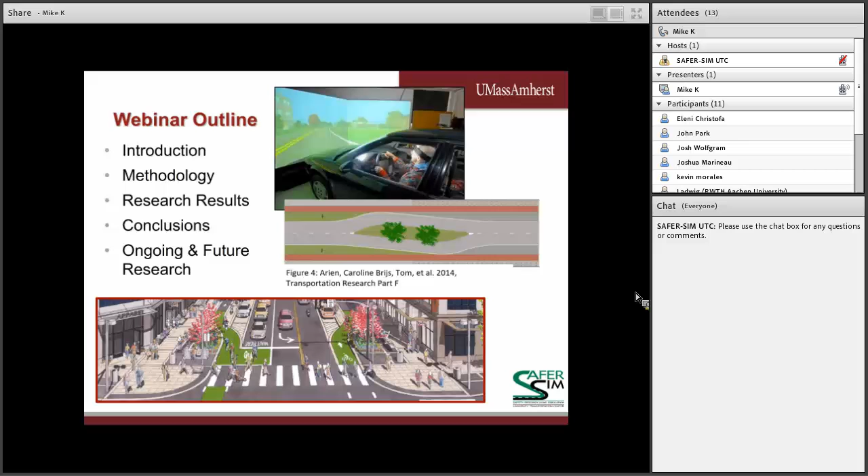So today, like I said, what we're going to do, a brief little introduction. We'll outline some of our research methodology, talk a bit about our results as well, and then, more importantly, some of the conclusions as well as some of the ongoing and future research that we're currently in the process of completing. And I know that the highlight talks about cross-sectional design, and we'll talk a little bit about why that's important.

First, by way of a bit of background here, there's several different factors that influence the manner in which people drive, and we could probably spend an entire day just talking about those different factors. It includes the significant amount of visual information that drivers are being required to take in while they're operating a vehicle, the impact of other vehicles and the influence that it has on driving, as well as our own vehicle performance, and certainly the weather and other elements such as that. And when we put this together, we think about, well, what is the cause of crashes?

And so, we have relatively famous graphics and some numbers that I'm sure most of the folks on the webinar are familiar with. But the roadway environment is a contributing factor in 34% of crashes. Human factors are a contributing factor in 93% of the crashes, and the vehicle is a factor in 12% of crashes. And when we think about those, there's elements of failure in roadway geometric design as it relates to the roadway environment, speeding and aspects related to speed under the human elements, and certainly vehicle performance under the vehicle characteristics that come along with that.

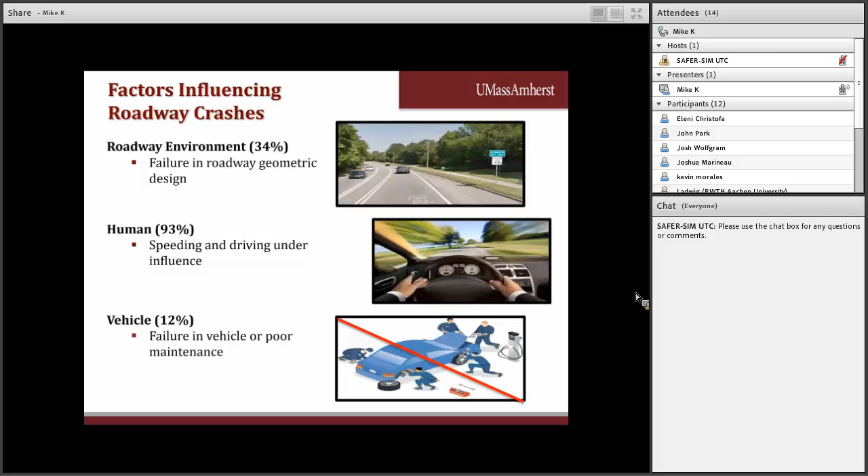And when we put that together, we end up with a graphic, again, a relatively famous graphic, where we look at the contributing crashes and the overlap between each of those elements within the system, the vehicle, the roadway, and the driver, and certainly the area where they entirely intersect. And we think about numbers. It's why we do what we do, right? So on average, the 37,000 fatalities from 2006 to 2010, or more recently the decrease, but now the fact that we're going back up again with respect to recent trends.

And one of the bullet points that we hear about on a regular basis, and our own data proves that, is the impact of speeding related crashes. And so, one of the things that we have the opportunity to do as transportation engineers is to identify ways that we can mitigate the effects of speeding related crashes, so that we can create an environment that makes it conducive to drivers traveling at the speeds that we ultimately want them traveling at.

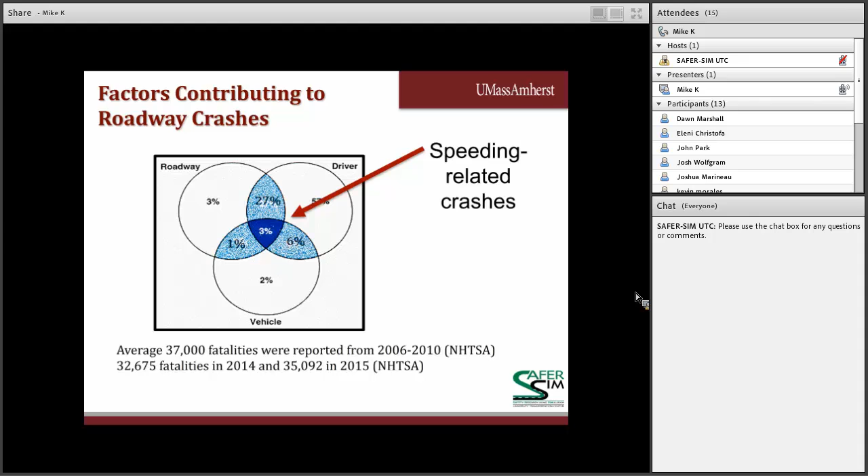And so the front lines of speed management in many people's eyes is speed limits. And again, you could take an entire course on this. If you've participated in the FHWA or NHTSA speed management course, a big part of the course is all about setting appropriate speed limits. I know we have some folks participating from New York. We've got folks in Boston. You're starting to see more and more municipalities lower overall speed limits to 20 or 25 miles per hour in downtown areas.

And one of the things that we know is, without a system-wide change, which is significant, if it's simply a roadway environment where all we do is change the speed limit, whether it's changing it up or changing it down, we know that the change in speed limit signage alone doesn't result in a drastic change in the speeds that we see on the roadway at all. And that's whether we adjust the speed limit upwards or downwards, and by as much as 0 to 5 miles per hour up to 15 to 20 miles per hour, the average speed tends to remain constant, which shows that the roadway environment has a significant effect on the speeds that people are traveling.

And so when you participate in different courses, there's a litany of different things that we can talk about with respect to roadway design. Context sensitivity, traffic calming, I'll talk a little bit more in a minute, but more commonly roundabouts or perceptual measures like some of the ones that you see here on the right, as well as vehicle activated speed displays, the notion of variable speed limits, which are popular in different parts of the country, and then the various roadway design elements themselves that we might think about.

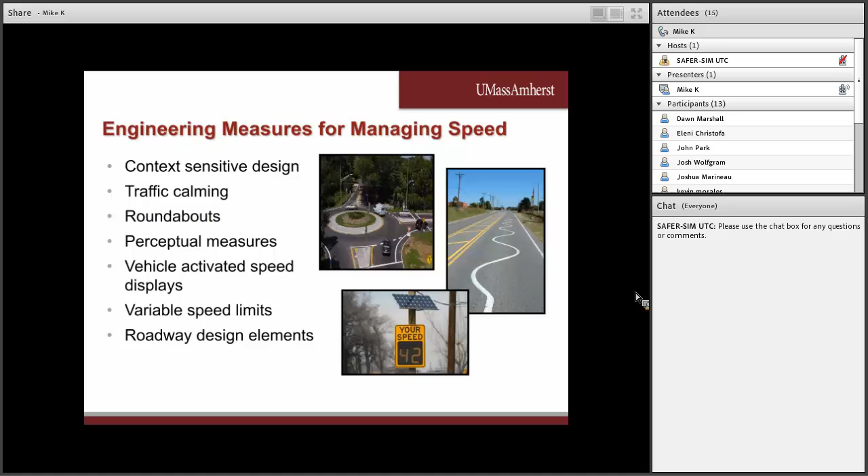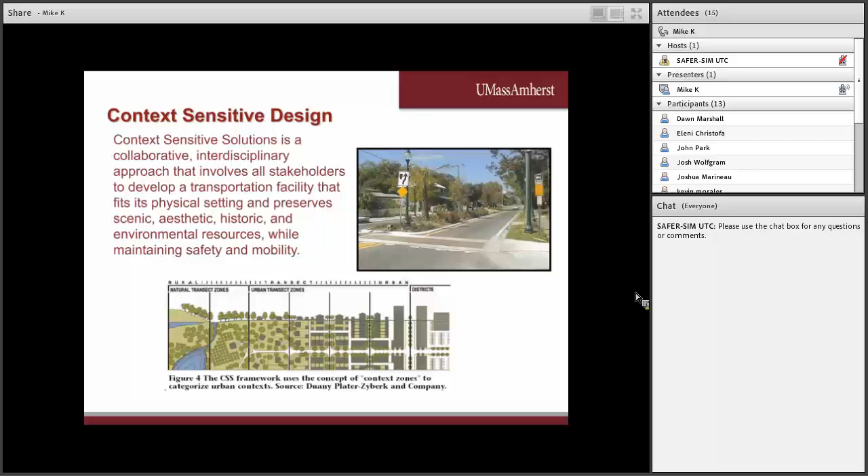So from a context sensitivity standpoint, right, altering the roadway environment to create an environment that's suggestive of a different speed or a more appropriate speed, or at the very least the changing context in which the roadway environment is changing. And then we think about traffic calming, whether it's neck downs or speed humps or speed bumps or many of the different traffic control devices that are intended to reduce speeds as a result of their performance.

But one of the things that we wanted to do in this particular study, apart from traffic calming and other devices, is think about the left to right, the cross-sectional design elements on a roadway. And we were primarily focused upon two different variables, speed and lateral positioning. And I'll talk about why those are significant.

But if you think about the roadway cross-section, as we think from left to right, we've got elements that include the side slope, the cross slope. Do we have a curb, yes or no? Do we have a shoulder, yes or no? Do we have a bike lane, yes or no? Do we have multiple travel lanes? If we have travel lanes, how wide are the travel lanes? Do we have medians?

And all of these different elements we know influence the speed at which drivers travel. And in isolation, we can identify what effect some of those specific elements have on travel. And there's been no shortage of field studies over the years that have identified what the impact of changing a roadway from this to that would have on speed, or changing a roadway from that to that might have on speed.

But we felt that that was somewhat limited, and here's why. There's so many other factors when you do a naturalistic study that would influence what behavior you're seeing, and there really hadn't been a true laboratory setting in which each of the variables was controlled. The drivers remained constant and we studied their specific driving performance to make sure that what they were doing was consistent

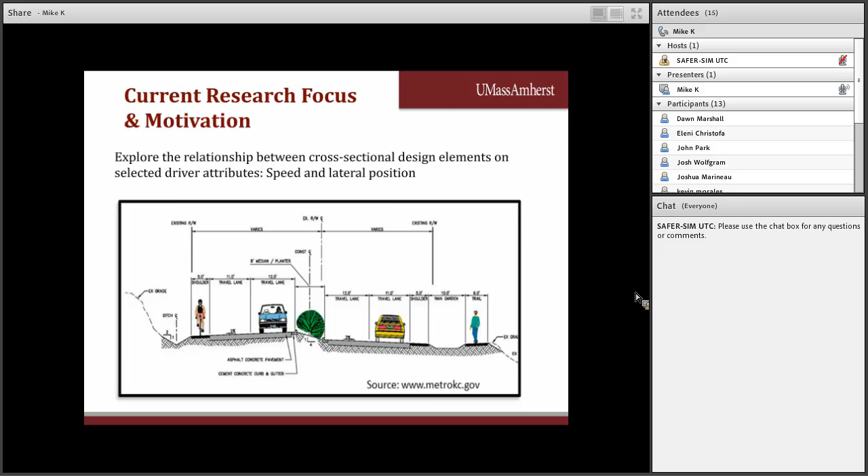And with respect to speed and lateral positioning, we might hypothesize what the influence of each of those roadway design attributes may be. So, for example, a narrower lane, we would expect to reduce the speed at which the drivers travel. We would also expect in a narrower lane that participants might move towards the center of the travel lane, or certainly to the center of the right-of-way.

We anticipate perhaps that a bicycle lane would not necessarily change the driver's speed, or you could actually probably make a case for why it might go up or down, but we wanted to know exactly what that particular influence is. And then what would the presence of a bicycle lane have with respect to lateral positioning, or what would the presence of a bicyclist within a bicycle lane have with respect to lateral positioning?

And similarly, when we look at raised medians and other roadway design elements, what is the influence on speed and lateral positioning? And our motivation for this study is really, we think we know these things, right? So we know bits and pieces of it, but what is it that we really want to know about these different roadway design elements? So I'll talk a little bit about our methodology and what we've done in this particular study. And it really starts here.

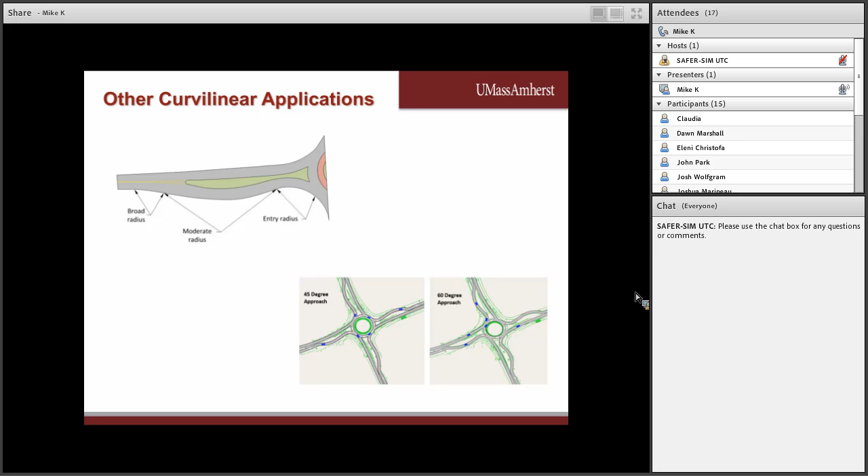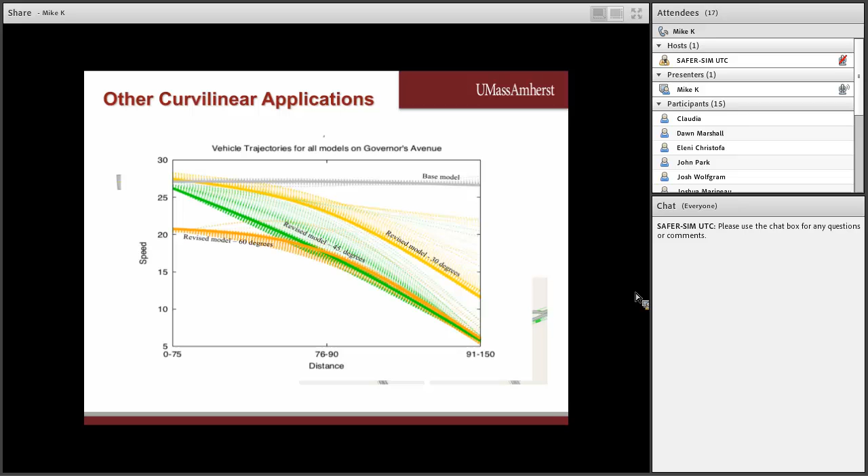And so one of the projects that we currently have ongoing that we'll talk a little bit more about later introduces varying degrees of curvature on the approach to a roundabout. And I'll just hint at this and say that some of our preliminary work is really quite positive in that we see that the approach speeds are significantly reduced as we modify the curvilinear approach as drivers are entering the roundabout environment. And so we can talk about this a little bit more.

So getting into the apparatus, our driving simulator is a fixed-base 1995 Saturn sedan, 3 screens, 150 degrees of horizontal view, and a resolution of 1400 by 1050. In fact, that number is probably a little bit off. And I'm happy to report that after almost 2 decades of spouting off those various statistics, we're actually about to upgrade our simulator next week, 2 weeks.

We're going to upgrade our simulator, and so it will no longer be a 1995 Saturn sedan, but more likely a 2015 Ford Fusion, which is a big leap forward. But not only that, we'll also introduce the presence of 2 additional horizontal screens, so jump to 5 screens, as well as a 6th channel, which will be rear projection and simulate the rear mirror.

And then the other big part of our work is the mobile eye tracker. Our particular eye tracker that we used on this experiment was the ASL head-mounted, visual angle 50-degree horizontal and 40 degrees vertical direction. And then you see a picture of it there, where it's really not intrusive to the driver in any way, shape, or form. We put what amounts to the glasses or the goggles on the driver.

It's got a scene camera so that we see exactly what the driver sees, and then it overlays a set of crosshairs so that we know where exactly within the environment the driver is looking. So it provides not only the scene camera, but within the scene we are able to know where it is that the driver is looking.

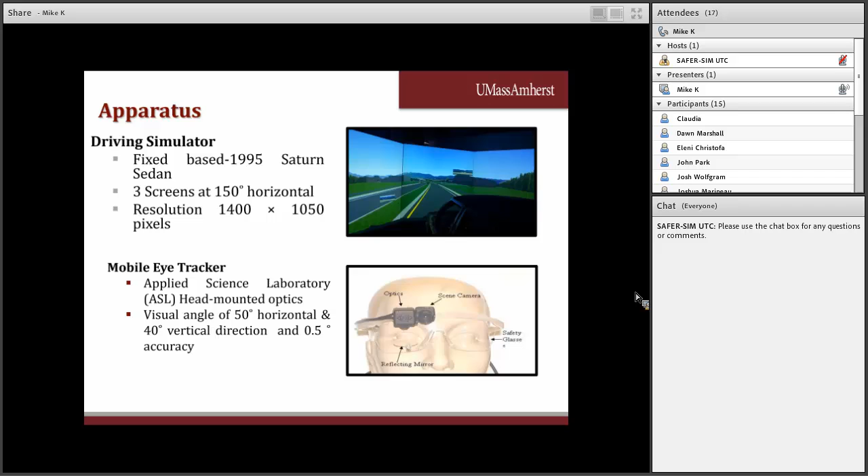Now, some of you might at this point say, well, wait a minute, there's no way to replicate speeds in a simulator environment. You can't simulate many of the different design features that we have in the roadway environment. And the reality is that's not entirely true. And in fact, one of our studies going back over a decade was just that.

It was a validation of the use of simulators for speed-related research. And one of the things that we did was we replicated a stretch of roadway in the simulator and in the field, and there were really 4 different layers to the previous work. The idea was to not only get a sense of what drivers were traveling at with respect to speeds, but also what drivers thought that they were traveling at.

So for a sample of drivers, they drove both the simulator course and the field course, and at different points, their speed was occluded from their vision, and they were asked how fast they thought they were traveling, and then we also recorded the speed at which they were traveling. And so we matched up those values from the field study with the exact same checkpoints from the simulator study, and identified how well we were able to do in terms of matching speeds.

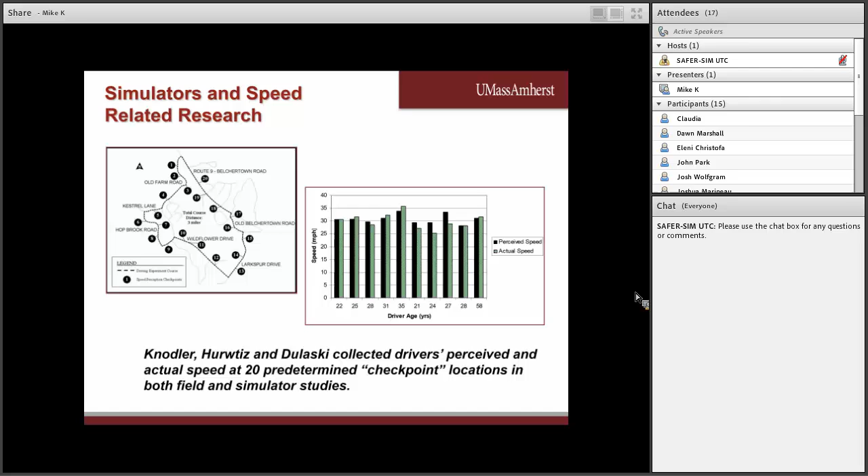Now, the speeds in the simulator were a little bit faster overall, but the discrepancy between perceived and actual was identical, and so with a slight little calibration, we were able to know that the magnitudes and the changes of speeds were appropriate, even if the overall speeds were a little bit higher in the simulator environment. So just a little bit of background.

So because we were taking an existing roadway and we were manipulating it, we couldn't just take the simulator files directly and use them. It involved a couple of different steps here. So for those of you that are more from the simulator community, this would be a similar methodology that's been used at a lot of different University of Wisconsin studies, as well as a number of different studies here at UMass.

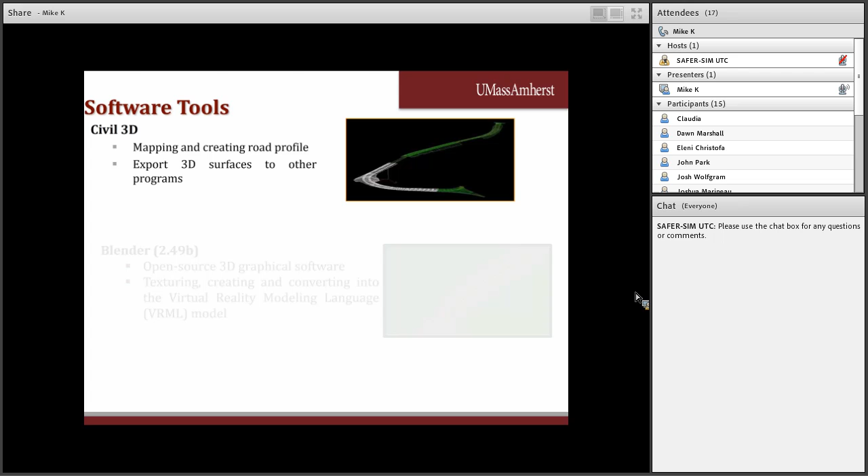So we first start by creating the roadway environment in Civil 3D, and then we export the 3D surfaces to another program, and in particular we import it into Blender, where we create the textures and we convert it into a virtual reality modeling language, or a VRML model, after which time we bring it into the simulator environment using their proprietary software associated with our RTI driving simulator.

So going through these steps did a couple of things. One, it allows us to take any geometry that we want and import it into the driving simulator in a relatively quick time frame. So if we want to take an existing roadway for which we have a Civil 3D drawing, the idea of bringing it into a simulator environment and driving it before you open it up or start the actual field design process is relatively straightforward.

But more importantly, for our particular study, it allowed us to manipulate the roadway cross sections in the way that we wanted while holding all else constant. And so again, we were manipulating the 5 different roadway cross sections within the study here.

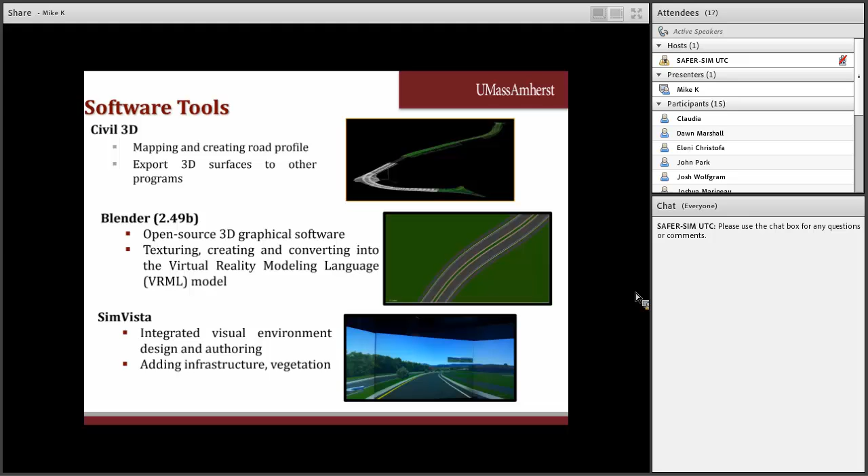So just a quick talk about our design variables. Our independent variables included things such as the lane width, the bicycle facility, the curb median, the clear zone, the shoulder, etc. Basically the 5 different scenarios, so the base case plus the 4 different experimental ones. And then our dependent variables were speed and lateral position.

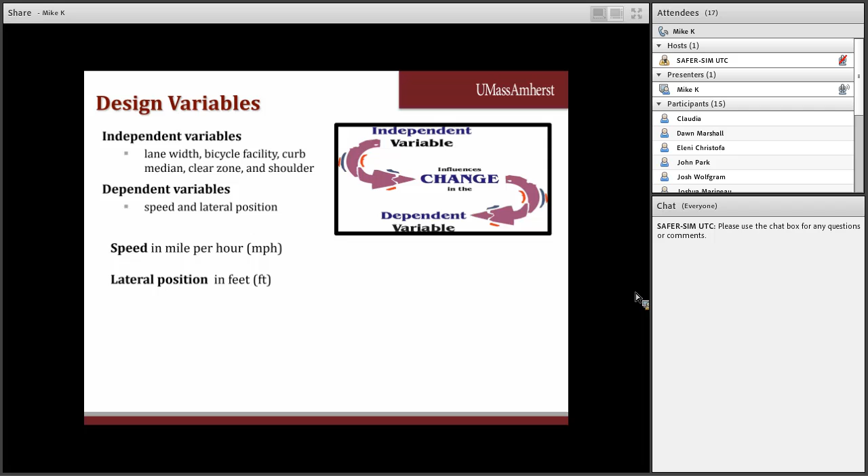And we were really looking at how fast the drivers were traveling in miles per hour, as well as where they positioned or aligned themselves on the roadway with respect to the center line of the roadway. And we measured their lateral deviation in terms of feet as they departed from the center line of the roadway. And so here's just a graphic that highlights how exactly we did some of this in this particular study.

And so in terms of our experimental design, each of the 5 virtual worlds took on average 2 minutes. Our goal or our target was to keep the overall amount of time in the driving simulator under 15 minutes. This was to cut down on incidents of simulator sickness.

For those of you that have participated in a simulator study before or have run them, you certainly know that it is a possibility. We tend to see older drivers, drivers with glasses, and other attributes associated with simulator sickness. We wanted to minimize simulator sickness, and one of the ways to do that is to minimize the overall amount of driving time, in addition to turns and several other things that we can do. So with that, we tried to keep the drives relatively short.

Each driver that came in drove each of the 5 scenarios. Because we were working in multiples of 5 here, we ended up with 20 total subjects. I'll talk about that in a minute.

We had no other traffic in the participants' direction of travel, but there was ambient traffic in the oncoming direction. And again, throughout the drive, we measured their speed and lateral positioning. We segmented each roadway into 5 different check stations or checkpoints, and within those checkpoints we measured vehicle speeds and lateral position for each driver within those lanes.

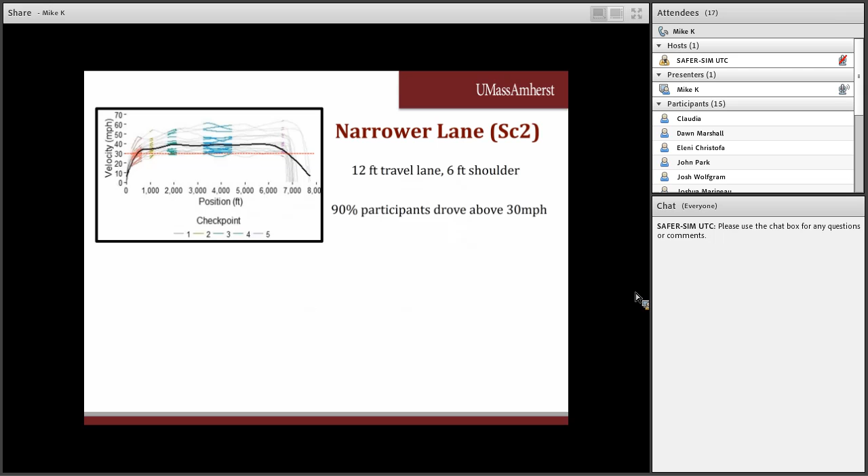We actually have a little bit more in the paper where we condense these trajectories and look at them in more detail rather than at the aggregate level. We see similar trends, but you'll notice that the paths of the trajectories change just a bit as we introduce a narrower lane. It's not as linear and increasing. But we still see in the narrow lane scenario that 90% of all the drivers were traveling over 30 miles per hour across the majority of checkpoints. And it's not until we introduce the bicycle lane that we start to see these speeds reduced as part of the drives.

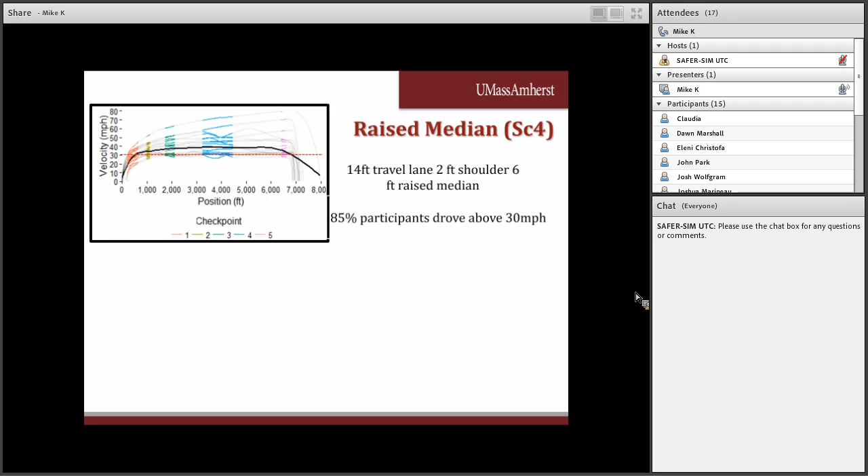And then just lastly, with respect to speed, the raised median, 85% of the participants were above 30, so still a reduction from the base case. And then the curve profile, a significant reduction in terms of the overall speeds that we were seeing. And I'll talk about some of the statistics in just a minute in terms of how we looked at that.

And so this is a ton of data here, but let me walk you through this. So on the left, we have each of our checkpoints: the start, the straight, the right curve, the left curve, and the end, or the fifth station. And you'll notice that this was how drivers sequenced through each drive, right? So they went from 1 to 5 in terms of the checkpoints, and then as we move across the columns, it's the base scenario as well as the narrower lane, the bicycle lane, the raised median, and the curved profile.

And then what you see presented for each cell of the table are the average speeds of the 20 drivers at that particular location, as well as the standard deviation for that. A couple things that I want to highlight here. One, if you take a look at the trend as we move down the rows, you can see within a given scenario what happens to the speeds.

And if you look at each of the columns independently, you'll notice that there tends to be a general trend. So scenario 1 all the way through 5, there's a general increasing trend. And same thing for scenario 2, scenario 3, scenario 4, right? And then ultimately scenario 5 is a little bit different profile, but the idea is that at the end, the speeds are faster than at the beginning. And then as we move from left to right across this particular graphic, that's our comparison. So at that same start point, for each of the 5 experimental scenarios, what was the impact on speed?

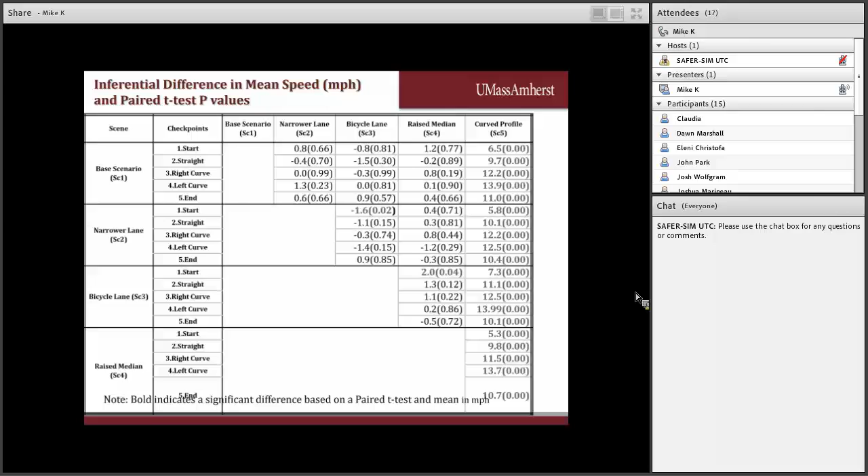So generally speaking, the speeds across the scenarios and across each of the checkpoints were relatively consistent from a statistical standpoint, with the major difference being the curvilinear roadway profile, where we were able to manipulate and exact changes in speeds.

And we did the exact same thing with respect to lateral positioning. So we looked at the observed mean lateral positions for checkpoints again across all 5 scenarios. Oops, jumped the gun here. And I'll highlight just a couple of quick differences here. The narrower lane scenarios resulted in drivers traveling closer to the center line. So when we tightened the narrower lanes, the drivers were shifting their path to be closer to the center line.

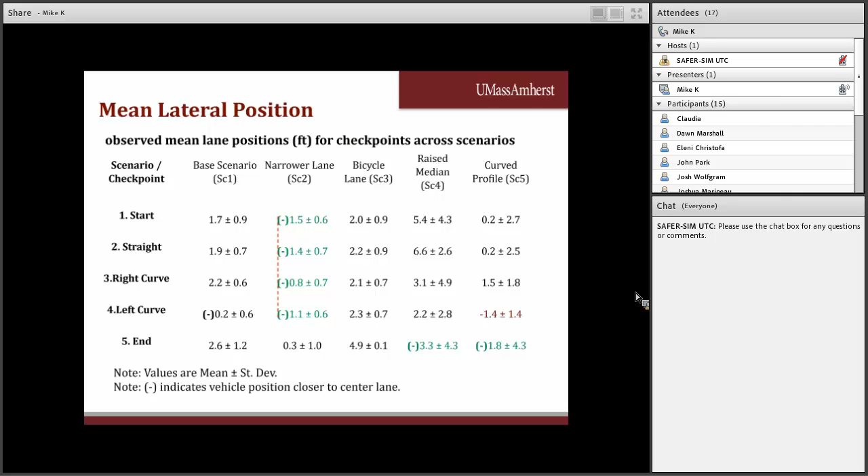Which again we may have expected, and we saw some evidence in the final scenarios with both the raised median and the curvilinear profile, where drivers were traveling a little bit closer to the center line as well. And so we did the exact same thing with respect to making all the comparisons. So we compared the base case, for example, to the narrower lane, and the narrower lane had significantly different lateral positioning than the base case.

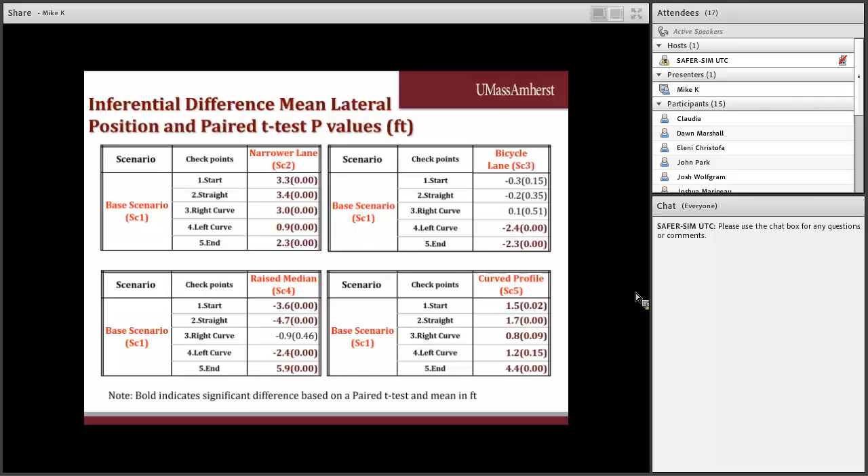And so this is the one that highlights just the specific impacts associated with narrower lane, because the narrower lane was really the most significant factor in terms of manipulating the lateral positioning of the vehicles within the roadway environment. So as we manipulated the roadway environment to make the roadway more narrow, this is where we saw the most significant changes. And again, there's more details that we can share with everybody as part of the full paper in terms of some of the ramifications here.

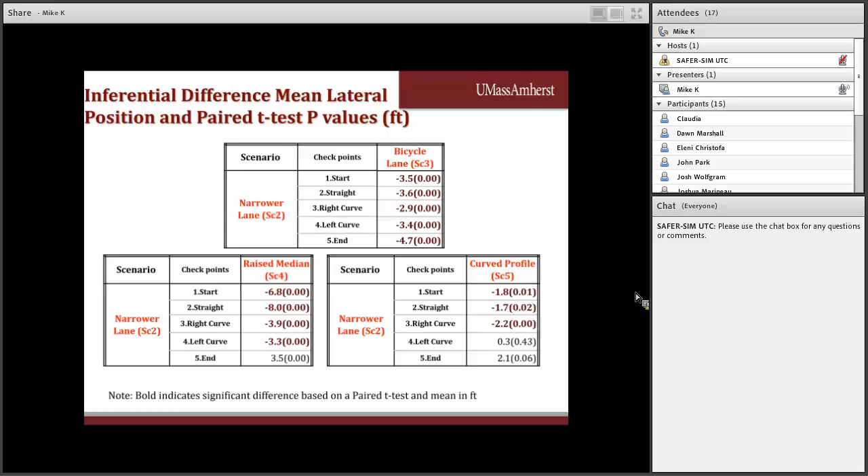Lastly, just comparing some of the last scenarios, the bicycle lane versus the raised median. As I make my way through these last couple of slides, there were a bit more differences with respect to changes in the lateral positioning from a statistical standpoint than what we had seen with the speeds, and that changed throughout the different checkpoints. So checkpoints 1 through checkpoints 5.

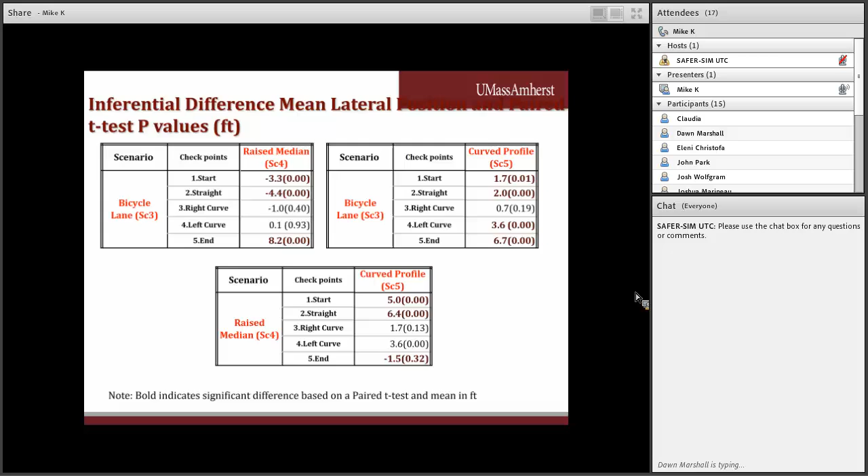So tying it all together here, again, the first one's not really surprising, but we're certainly digging into a little bit more of the data now to identify exactly what we can say about that. And one of the things that we're doing is we're aggregating the trajectories in different ways to see what the influence is on speeds. I mentioned this one over the last handful of slides, but with the narrower lanes, participants drove towards the center of the travel lane.

In the curve profile, the influence of speed and vehicle lane, the curvilinear profile definitely had an influence. And if you were looking to change a roadway environment, the introduction of a curvilinear roadway has the potential to change driver behavior in a positive way, if again your goal is to manage speeds and slow speeds down as a result of that.

There were no differences in driver speed patterns between the base case and the bicycle lane or the raised median scenarios. So that was a little bit surprising, to be honest. We had expected to see that, and so we're still investigating some of what might have led to that. One of the things that we didn't do that we might have done or might do in future work was introduce or materialize the presence of a bicyclist.

And so one of the things that we found, or we suspected, was that in the absence of a bicyclist, drivers were treating the bicycle lane like a shoulder, and because they had that nice wide shoulder adjacent to the roadway, they felt comfortable traveling at the high rate of speed that they were already exhibiting in the base case. And so trying to identify some way to account for that, which is, again, something that we think.

And then a little bit more interesting was that there were no differences with respect to the raised median scenario. And again, kind of trying to think about what might have led to that. There was, again, a layer of protection that was provided to drivers because they were isolated from the traffic on the opposite side of the road. They felt comfortable. They felt like they had a cushion. And so could we manipulate the roadway further, but still provide the layer of safety associated with a median, but manage speeds at the same time.

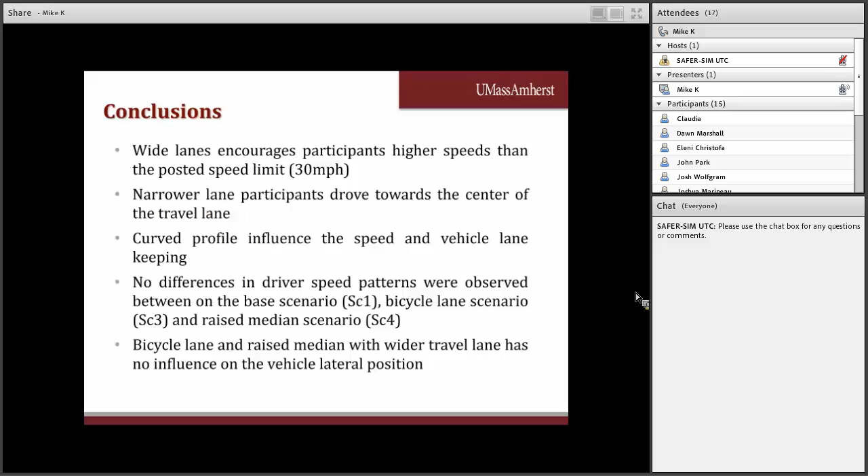So just a couple of closing thoughts, some of the things that we're currently looking to do. One is that we hope to see what the impacts of the new simulator environment may be.

And one of the things that we're talking about is whether or not to replicate and run a small cohort of drivers through these same scenarios in the new simulator environment to see if there was something with respect to the fidelity that may have resulted in some of the findings that we're finding here.

The other activity that is currently ongoing, although we're a little less certain it's going to yield anything particularly exciting in this case, is the expanded analysis of the visual search. We don't necessarily expect that any of the roadway cross-sectional environments would change the scan pattern of the drivers, but it might be worth taking a quick peek at to see if there is something that would happen there.

And we're also working with some of the nearby municipalities as part of some controlled field studies, and in particular taking a roadway environment, studying it as is, and then introducing pop-up bike lanes, introducing narrower lanes. And another experiment that we're excited about is the idea of taking a roadway that currently has no bicycle lane, has a center line down the middle of the roadway, and instead removing the center line and introducing bicycle lanes on either side of the roadway environment.

We think that there's going to be something that's interesting with respect to how vehicles align themselves and certainly the speeds that they select. And then, as I alluded to earlier in the study, some of the other things that we're looking at is some of the different curvilinear enhancements and where curvilinear roadway profiles may be advantageous. I mentioned the example of the roundabout entry, and certainly want to study other aspects where that may be most applicable.